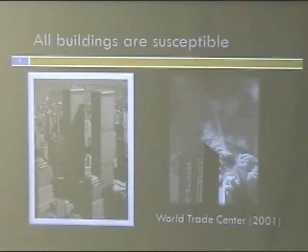These problems received very broad attention after September 11 and the World Trade Center collapse, because people realized that all buildings are susceptible. Every building is vulnerable to such abnormal loadings, and it can collapse and people can die. A very good example of the current state of design and practice is the collapse of Murrah Federal Building in 1995.

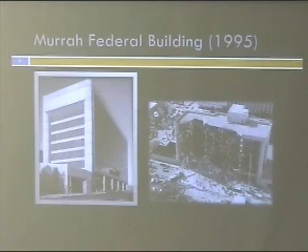Usually the buildings are designed to stand. So you build a building, like Chris said, you walk away, the building is there. No one is considering the abnormal loadings or the disasters in the design process. So when such abnormal loading like an explosion happens, this is what we saw in 1995. There is an explosive going off.

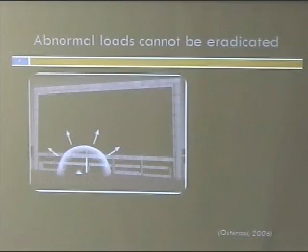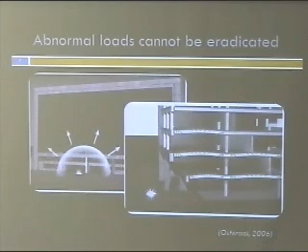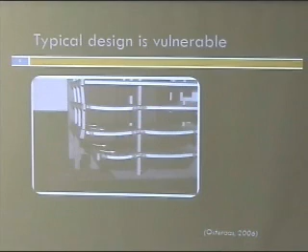We see the blast pressure entering the building, raising the slabs, and they were lacking reinforcement at the top because it's not the usual action. Usually the slabs don't bend upwards, so they cracked. And once the pressure wave passed by, they collapse. The cracked hinges close to the supports are unable to support the slabs anymore. The slabs are damaged. They fall down.

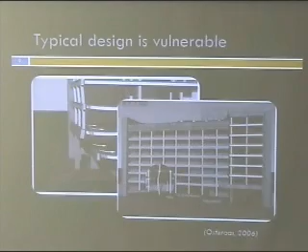We see the columns. They lose the lateral support, so they buckle. We have 3-4 stories of unsupported columns, and they are not designed for such loadings. And the building collapses. People die. We have news coverage. So these are the things we want to avoid.

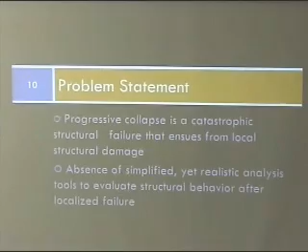And when we state the problem, we can say that progressive collapse is a catastrophic structural failure that ensues from local structural damage. So we damage a structure very locally. We do little damage. We destroy 1 or 2 columns, and the result is disproportionate to it. The other main difference is the time scales. The initiating damage happens over milliseconds, and then we have the global damage happening over seconds in a different time scale.

And what we have now, after many years of research in this area, is that we still have absence of simplified yet realistic tools to evaluate how the building is going to respond to such a disaster, such tragedies. What is the research I propose?

I have a unique expertise because I received my master's in mechanical and civil engineering. So part of my training was done in Germany at the RWTH Aachen, and part in civil engineering. So I have this unique knowledge of mechanics, which most of the civil engineers don't have. So I use the car crash simulation tools, which are more advanced than civil engineering tools.

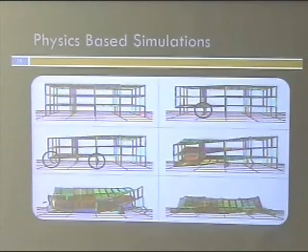The automotive industry uses it to simulate car crash, BMW, Ford, all these companies, and they are based on very sound physics, but they are very difficult to use. You need teams of people who can use it. So I use these tools to simulate the progressive collapse of buildings. This is a steel frame, and 2 columns are instantaneously removed, and we see how the building responds to it.

We see the simulation, and when people question it, they say, oh, it's nice animation. How do I know it's true? How do I know it works? So this is the whole art of it. You can give the same software package to someone who knows what he does and to someone who doesn't, and you will see different results.

So what I did is a validation test with the experimental data. So this is the LRFD buckling load curve, and this curve is derived experimentally. People in the 80s tested hundreds of columns. They came up with a curve fit. The dots represent the results I obtained in simulations, so basically applying compression to a single column and recording the buckling load. We see very good agreement.

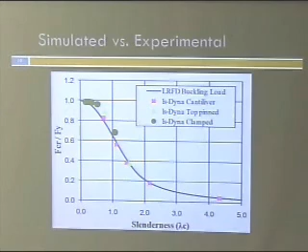I had to use large strain models, large deformation models, introduce random imperfections to the shape of the columns and the assembly accuracy using the codes. So this required a lot of work, but at the end we can get to the physical reality.

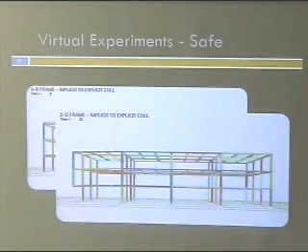So this is an example of a simulation when one corner column is removed, and usually these corner regions are the most susceptible ones, and we see that the building survived. So we performed a virtual experiment. It doesn't cost us anything. We just use software. We know what we do, and we see what would happen if we had an explosion in the corner of the building.

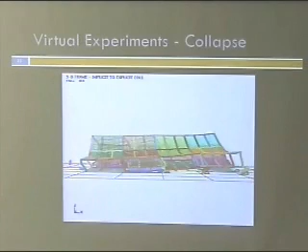And this is an animation showing the structural response when we remove two columns, and we can see that the building would collapse. This is an illustrative example where all the connections are very strong. So they are like welded connections, and it shows that very strong connections are not always the best solution. This is what is advocated right now in the codes as a prescriptive measure, that we tie everything together, and this makes the building safer and stronger.

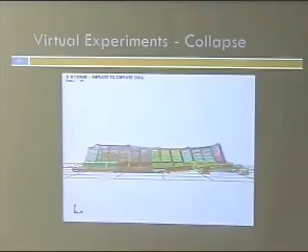But if we have a very large explosion, the collapsing elements will pull the surrounding structure down, and instead of limiting the collapse, we basically propagate it throughout the whole building. So there is no one simple answer to this problem. That's why we need more comprehensive and physics-based simulations.

And then how we test it, I came up with the free fall test. So basically when buildings fall down, they cannot fall faster than free fall. When we go to Italy, to the Pisa Tower, we drop a stone. When a building collapses, it will not fall faster than that. It can fall only slower, because we have columns which crash, which stop the motion, damp the motion.

So to achieve this effect, what people do in civil engineering with the loads, they say there is a pressure load on the slab, on the deck, 5 psi. And where does the load come from? It comes from the desks, from the paper, from whatever we have. But these objects, they all have mass. So by applying loads as pressure loads, we neglect the inertia effects. We neglect that they have mass.

If we do this, these are the curves we will obtain from the simulations. They fall much faster than the free fall curve. If we apply the load as gravity, so basically I would increase the mass of the deck such that the weight of the deck is the same as the loads we have. So basically lumping all the desks, all the seats, all the human loads into the mass of the slab, we will preserve the inertia property of this object.

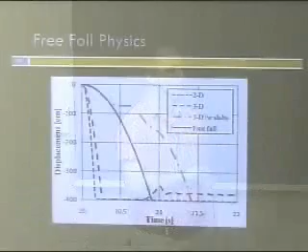So when we perform the simulation, we see that it follows the free fall curve, then it plateaus when the three columns buckle. The structure tries to prevent the collapse, tries to absorb it. It's overwhelmed, and the building continues to collapse.

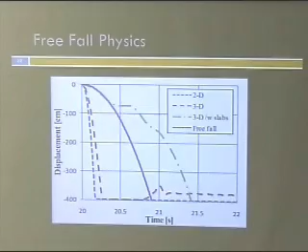So it's important to do these physics-based simulations because they give us the understanding of what we can do to prevent it. It's a good starting point to do general disaster management simulations, because I can take the same model and apply fire on the whole story, or hit it with a huge truck, or simulate a hurricane. So this is a model which can be used to simulate the whole array of different events.

So I think there is a potential to develop it, to go from steel structures to reinforced concrete structures, and it seems like engineers are pretty much satisfied with the level of design, the static design of the structures, but there are a lot of questions in hazard mitigation. If we have a strong hurricane, if we have an earthquake, if we have an explosion, what's the response going to be? So I see a big potential of developing this research in the future.